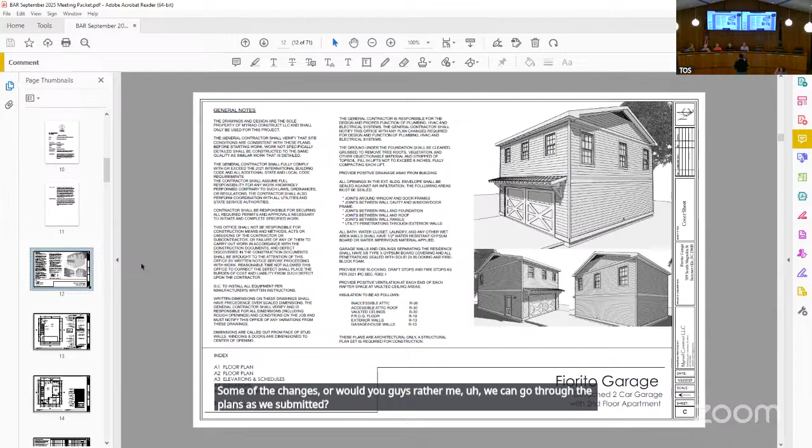I think the changes that you made are what would interest us. Okay, so I went back through both the notes from July and August, and also the video, so I am going to maybe double up on some of it. As you noted, one of the big things that threw us all off was the shed height, but due to that third support, we had it high just to have that support in. We were able to pull some measurements and drop that down and remove that center support. We really had to beef up that support for the roof structure, so we were able to do that. With doing that, it dropped down to where it was in the way of that carriage door. We made the garage door slightly bigger, but we did move the carriage door to the left. It changed some of the interior floor plans as well, but we can discuss that when that comes up. So right now we did drop the shed.

We were able to get the windows across. We would love for the windows to be the tall and skinny windows like y'all asked for, but unfortunately the far left window is right above the toilet. So bringing that down would bring it in front of the toilet, or else we would absolutely love to match the windows from the right side all the way around. So instead of having odd shaped windows, we went with the smaller windows, at least for the front. The door went to the side. I believe on the front elevation, that's all we added, except for maybe the bottom trim that may have been there in the last one. But I know we did do some trim boards to break up that siding on the side.

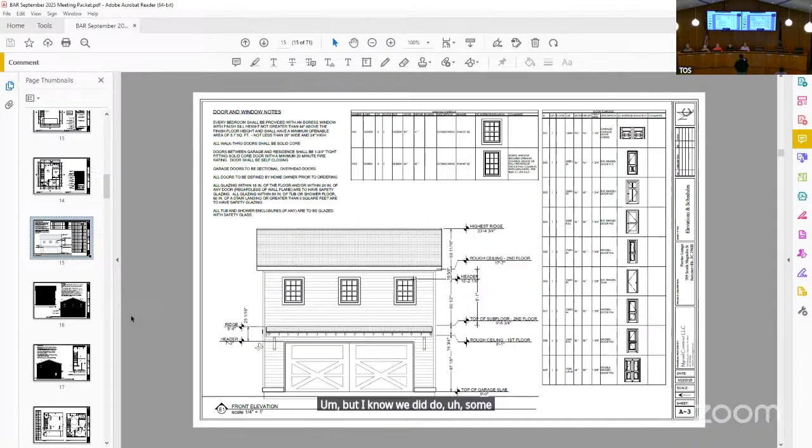Siding on the side, we added a band board in the middle to break that up. And the biggest thing mentioned in the last meeting was the triangle vent to give it some better architectural feel, matching the vent on the main house. Again, bringing that shed dormer down, adding the band boards, and we were able to make the windows larger, getting tall and skinny ones on the Joyce Lane side for that architectural appeal.

We did leave the lower part blank, and I'll explain why a little further. It gives us good reason due to the grade and the fence on that Joyce Lane side. So a majority of what you're going to see is what's presented architecturally.

Like I said, the carriage door moved. We left the window on that side. That window faces another property with another ADU in the back, which does change how we did the stairs. On the next page, it shows that better floor plan.

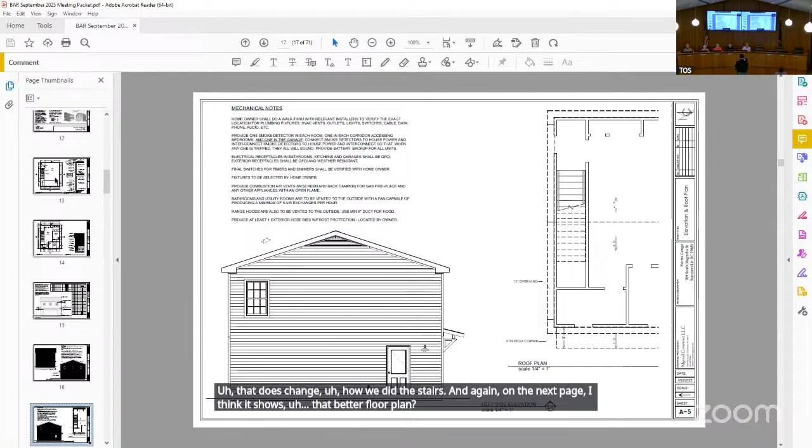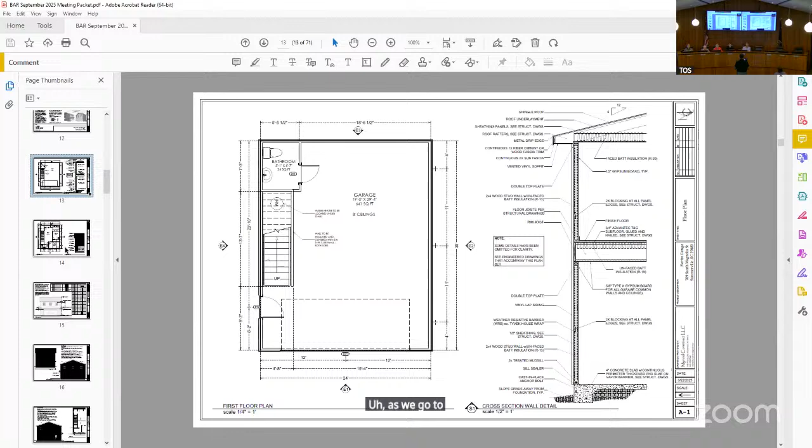Yeah, so it changes to where our firewall goes to the second story. The bathroom shown is on the first floor plan, a lower bathroom, half bath for the garage itself. As we go to the second story, that's going to show that firewall being up there.

Same thing with the window, it just gives some light for the upper story. We did remove the range for the ADU residential compliance, taking that out due to the GFA, gross floor area of the overall structure.

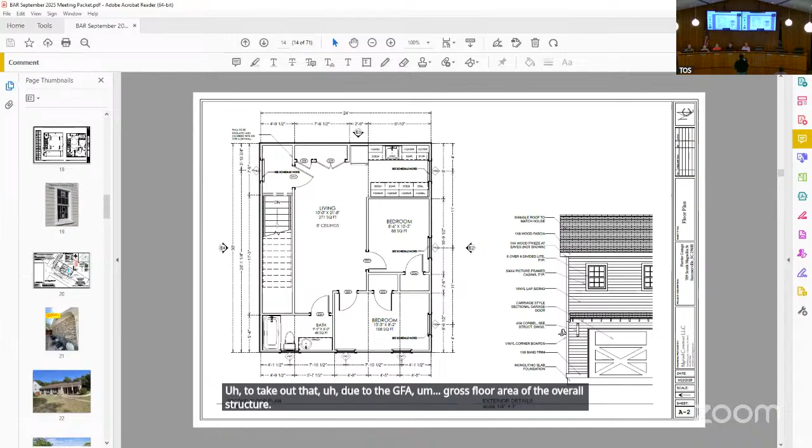Site plan we did fix from the last meeting. We had the garage doors facing Joyce Lane, which was just a clerical error overall. Now the garage door will face the main house with a typical egress from the fence line from the driveway to the front of that building.

We did annotate a little better with the trees. I think it was hard to see with just a dot. Those are large oak trees in those green circles surrounding it. It will be set off pretty well, but they do provide at least a little bit of area right there.

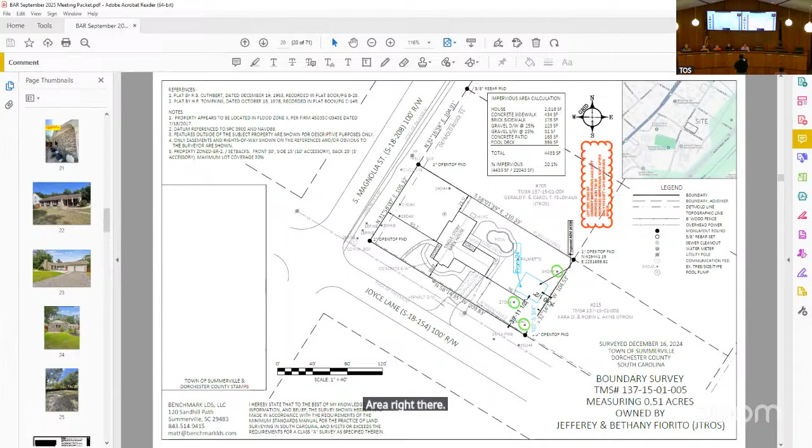I'll show this in two pictures. This picture is just a rough annotation of what won't be seen due to the grade. I did go out today and pull grade from what would be the front elevation to the fence line. There's a 14 inch drop between the two, so we're anticipating about 6 feet plus 14 inches, meaning a little over 7 feet of the side of the ADU won't be seen.

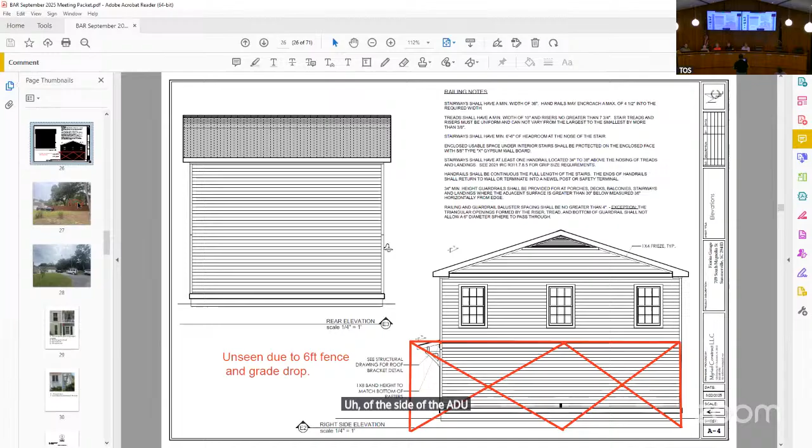My Picasso skills on PDF, so please bear with me on that. Again, we just wanted to give you as much detail as possible to show what will be seen through that fence. About 7 feet 2 inches of the side won't be seen, so we'll be probably right at the band board - the windows will probably be seen, but the lower windows won't be, which is why we left that blank. So that 14 inches of grade drop is basically from the corner right behind where that car is, down to where the front of the building would be.

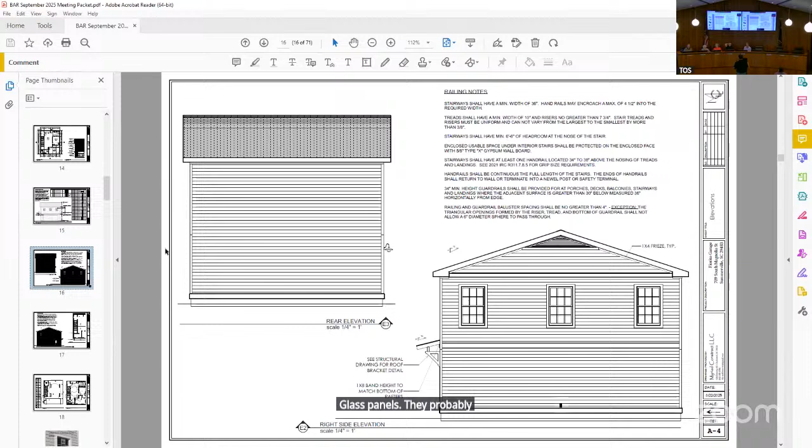I would think that if you're going to have those glass panels, based upon the proportions - can we go back to that picture? They would probably do best with either 4 or 5 vertical mullions to divide that up, with simulated divided lights. Yes, sir. I believe it would be whatever proportions we can match to the windows as close as possible. I think 4 or 5 is a very good number. And just vertical? Yeah, no horizontals? No, I like it.

Don't y'all think just vertical? Yes, I do. Yeah. Let me ask you guys, typically we go with the carriage style garage door. This is not that at all. It's a brick ranch house, so maybe it's okay. So that's what I was just trying to get y'all's opinion on. Because it's a brick ranch, maybe it's all right.

Just to clarify, the carriage style will be just the vertical, kind of like the side entry door - is that what I'm understanding? I just Googled the carriage style garage, so if you want to see it. That would be more like a carriage style garage, so it's very similar to that carriage style door we have for the entry door. It's very easily replicatable. I think it was just one of those things where we went with what our designer threw in. We can absolutely plan to spec out a specific carriage style door with vertical glass.

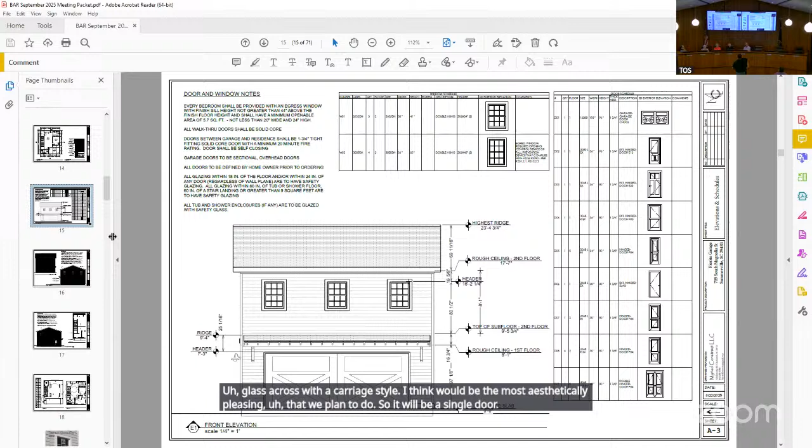I think this would be the most aesthetically pleasing option we plan to do. It'll be a single door with probably one glass pane with vertical mullions going across that single pane of glass. We'll let the final design of that door be handled by staff since they know what we want.

We trust Remy. I don't know how y'all feel, but I would like to see some chunky hinges, more like a historical architectural style. Not little ones, something that shows up, big, not those magnetic ones. Is that what everybody's doing now?

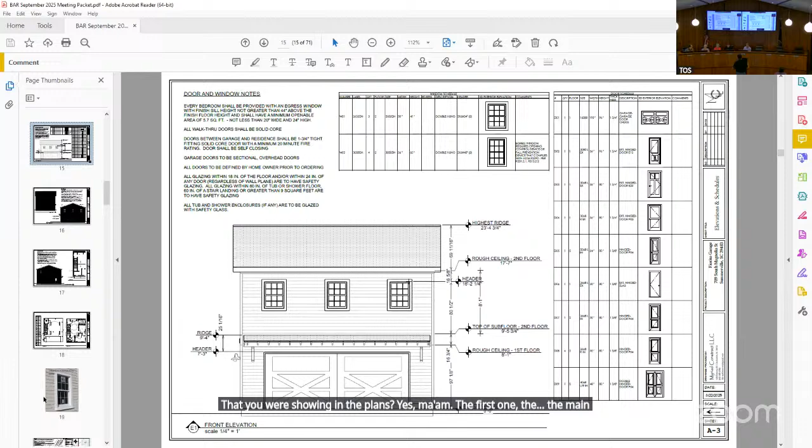I'd also like to note that I do like the picture of the window you were showing in the plans, the first one, the main image right there. When we found it, I was like, that's it. That gives us our 1x4, keeps it modest, but make sure we have the sill in it.

You see the detail at the hinges end, like that? Yeah, not that big, but yeah, that's nice. Alright, thank you for bringing the plans back, they look nice.

I have a motion. I'll make a motion that we approve as submitted, with the final carriage style garage doors to be approved by staff, and the band board at the second floor to be contiguous all the way around. I think that was it, right? Was there anything else?

Chunky hinges, typical details, simulated divided lights, mullions, and detail as shown on page 19 for your window detail. What we'll definitely do is chunky hinges, yes, chunky hinges, there would be chunky hinges. So just to clarify on our end, what we'll do is get the plans updated: carriage style door, glass reflecting everything, chunky hinges, and if we have to resubmit the plans, we'll make sure all this is included.

That way it's all in a file, consolidated for you guys. I'll send you an email tomorrow with all these conditions. You make the updates and send it back to me and then we're good to go.

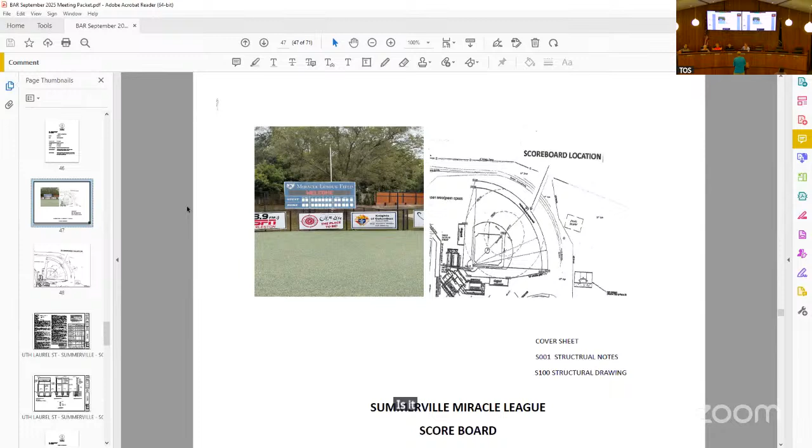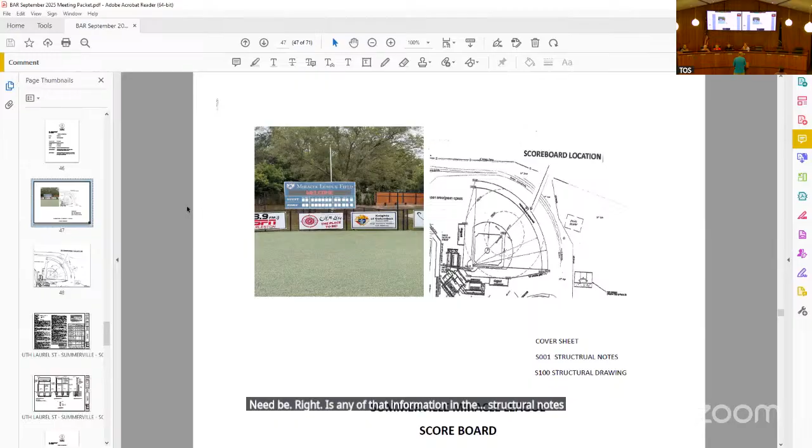I had one question. I wanted to know what material the board is made out of, is it wood or something else? I cannot answer that, I'd get back to you on that. Mr. Sign is putting up the scoreboard, but I could get back to him tomorrow if need be. Is any of that information in the structural notes maybe? I couldn't find it either. I don't have that information.

The electronic sign won't be on except during the game, is that right? Correct, we'll only be using it during the games.

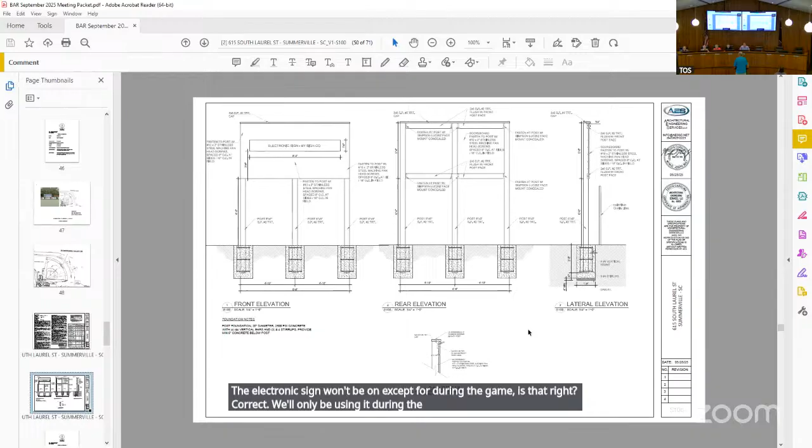Unless there are any other questions, I would like to make a motion that we approve as presented. I'll second.

And really the material, I don't think it's wood, okay, but it's gonna look great. It'll be great, yeah.

All right, we've got a motion and a second. Tim, yes. MC, yes. Beth, yes. Nancy Jean, yes.

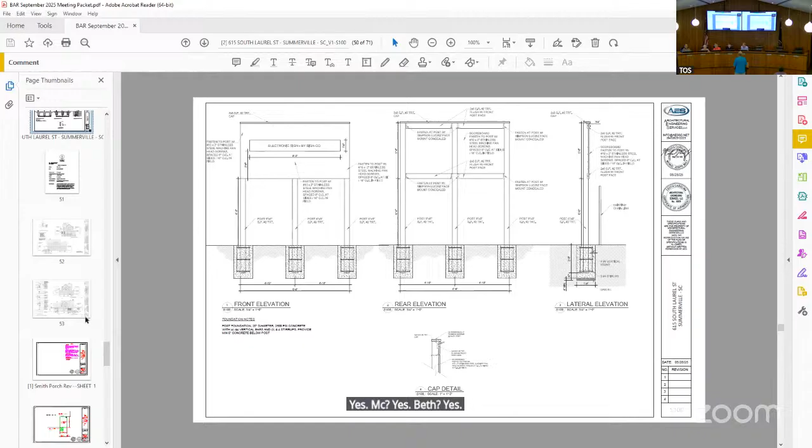All right, now 101 Briarwood. I'm Laura Smith and I live at 101, and I have a monsoon over my back door every time it rains. When I built the house I knew that was gonna happen. I told the builder, where's the stoop that was supposed to be there? It's on the plan.

You don't need that, gutters will fix it, they told me. No, no. Over the last few weeks trying to move into the house, I said now it's raining in if I walk into the house. Well, those gutters are gonna fix it, they said. It has not, it's been a major problem. With all the roof lines, as you can see, this is the original plan, on the back porch where the little deck area is.

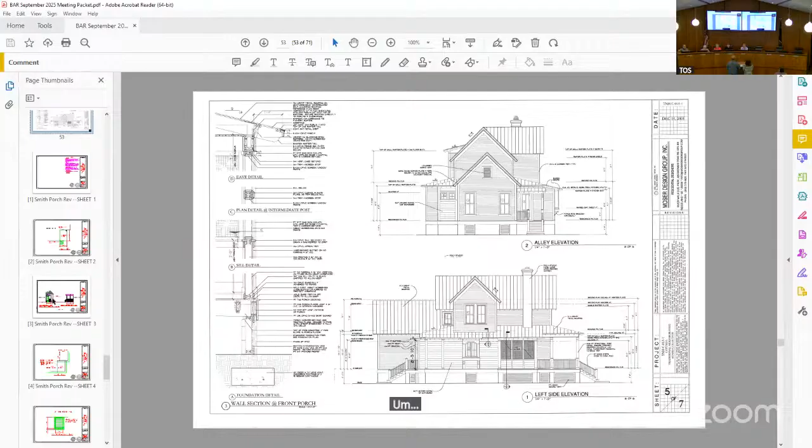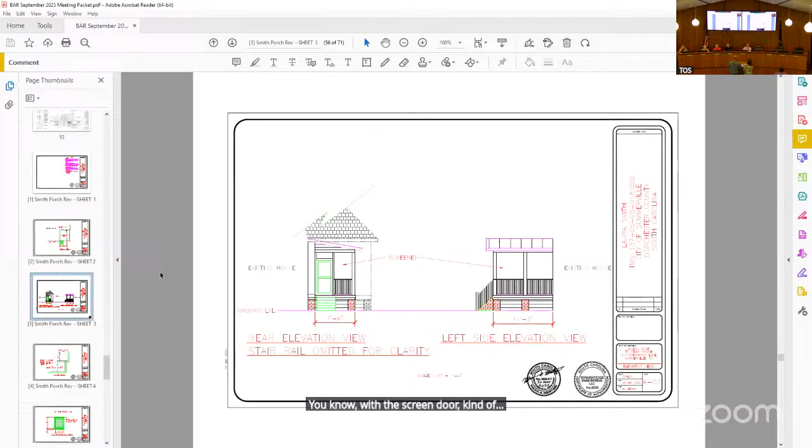There was supposed to be a little stoop there, but it didn't go there. I got Mark Murding to help me look at the original plan, and he created a new plan to create a little back porch with a shed roof that would drain off into the yard, not on my head as I'm walking out the door. We figured let's just make the little porch be a porch, like a little mudroom porch with a screen door, simulating the other porch I have on the other side of the house.

I've got a picture, did any of those come up? The photo of the porch on the other side of the house, it would look very similar, a kind of similar but smaller version of that.

So, simple porch, screen door, like I already have on that door on this side of the porch. Really nothing different other than adding screen, shed roof, and screen door. I did feel like I would kind of like a little metal black roof to match the little metal stoop roof on the barn I rent out on the same property. I'm not sure I took a picture of that, maybe I did. But I know sometimes y'all prefer it to be the same roof material.

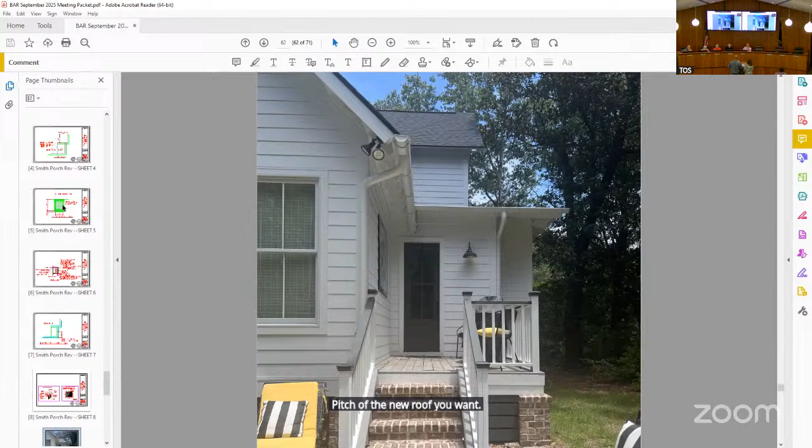What's the pitch of the new roof you want? Let me see if it's in here. I think it did have a little metal black roof noted. The pitch is 2-12, it's kind of flat for shingles, isn't it? Pretty flat for shingle, yes sir. Yeah, I think she'd be better off functionally with the metal.

This is on the back of the house, you really can't see it from anywhere. It's a little deck area just for cooking out and sitting, but a little mudroom situation, a porch would be good, and it will keep the water off us going in.

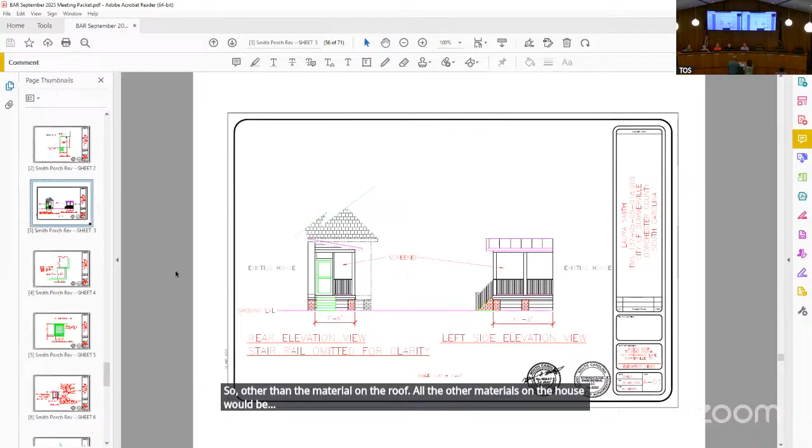So other than the material on the roof, all the other materials on this porch would be the same as the house. Very much, I think. We would match, we'd have 8 1/4 smooth siding for any place we would, which would really only be on one end of the shed roof. And then we would duplicate posts and everything, and the spindle pattern from the front porch. That's why I put the picture in the packet of the other porch toward the front of the house.

So you could see the same type of post, screen, and pretty much everything, except you may leave the underneath of the metal roof kind of artistically open so you don't feel like you're walking in. I think what we talked about was the T111 or bead board exposed. You wouldn't see the metal itself, but we would have exposed rafters with the T111 or bead board above it.

Everybody good? I'm fine. Have a motion? I would make a motion to approve it as is. I'll second. All right, we have a motion and a second. Tim, yes. MC, yes. Beth, yes. Nancy Jean, yes. And I also, yes.

Thank you for always submitting great plans. Mark drew up a good thing, and to be able to correct this little problem, I wish I'd done that when I built it. Hindsight 2020. Good luck. Thank you, have a good night. Thank you.